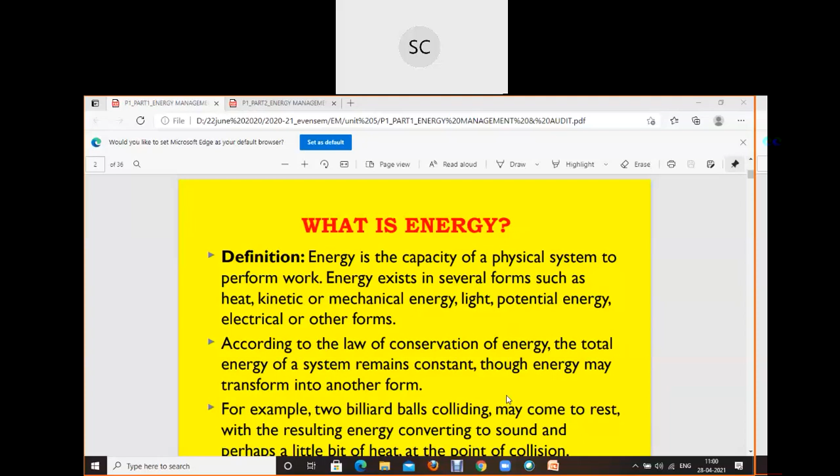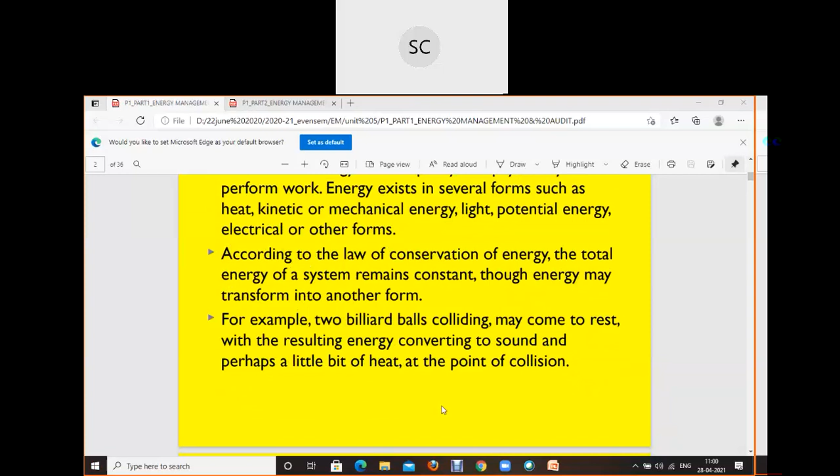Now, energy is the capacity of a physical system to perform work. Energy exists in several forms like heat, kinetic, mechanical, electrical, potential, and other forms. According to the law of conservation of energy, the total energy of a system remains constant throughout; it can only transform from one form to another. This I told you during energy conservation too. Energy can neither be destroyed nor created; we can only transform energy from one form to another, like two billiard balls colliding may come to rest with the resulting energy converting to sound and perhaps a little bit of heat at the point of collision.

Okay, let's talk about types. What does mechanical energy do? That is going to result from movement or the location of an object, and it is a sum of kinetic and potential energy.

Another form of energy, I just recommend you note down the types. Mechanical energy, and what about thermal? Heat energy reflects the temperature difference between two systems. Nuclear is the energy resulting from changes in the atomic nuclei or from the nucleus. Chemical energy results from chemical reactions between atoms or molecules. There are different types of chemical energy like electrochemical energy and so on.

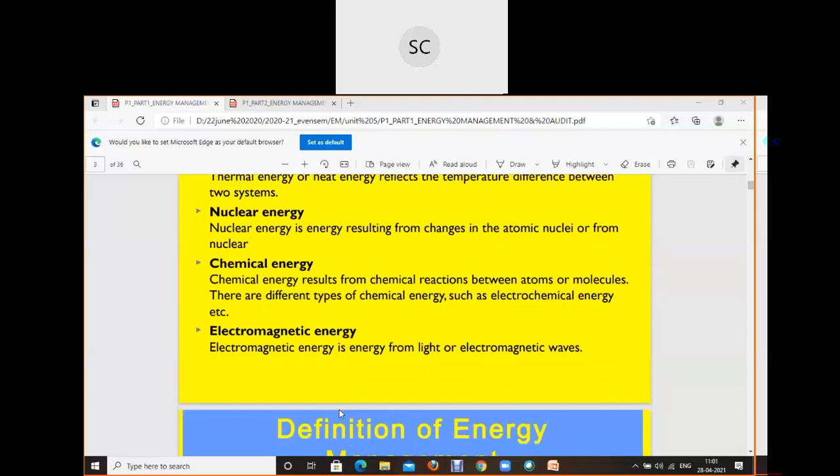All this energy, what they are doing is converting their state from one stage to another.

Energy management finally is what? A strategy, I told you this yesterday too, the strategy of adjusting and optimizing energy using the system and the procedure so as to reduce the energy requirements per unit of output, while holding constant or reducing the total cost of producing the output from these systems.

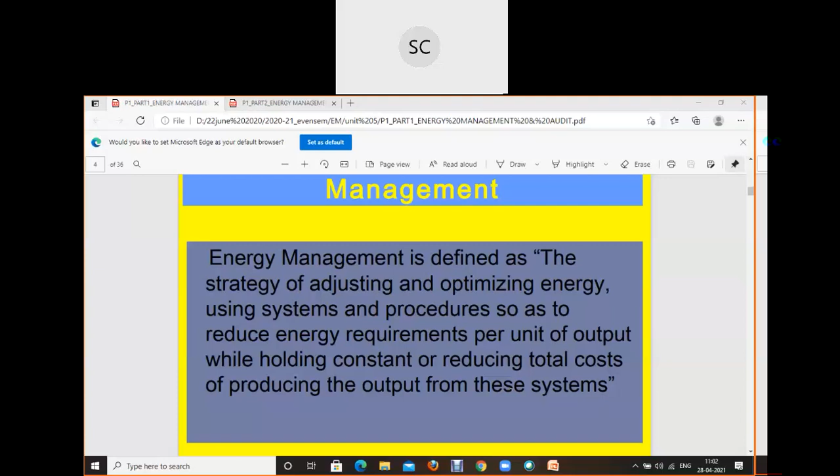This is the energy management system. How is it used to act? Energy management, for energy, acts as: plan, then do, then check. That means first, whatever management we are supposed to implement, we act upon that, then plan it, then do it, then recheck. At the managerial part, what we need to plan is policy, goals, targets, resources. What you need to do is training, communication, control equipment, systems, and processes. You need to check the correctiveness, preventive action, internal audits, etc.

Technically, what you need to do is plan: energy data management, assessments, energy purchasing, design, projects, verification. You need to check the monitoring, measurements. You need to act on the system performance.

Take a screenshot, no need to write it down. That is not very important. But yes, whatever plan we are doing, we need to act according to that: follow it, do it, recheck. That is the thing: plan, do, check, act. Meaning, after implementing the plan into action, whatever preventive or correctiveness is there, you need to check, and then act accordingly.

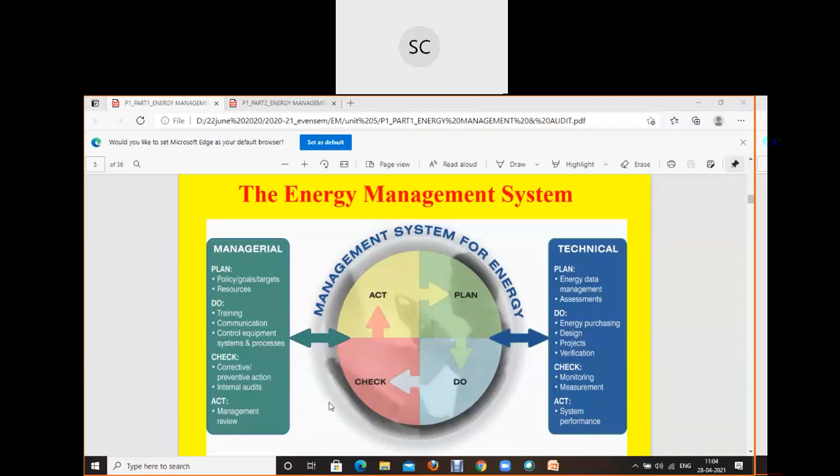Now comes the objective of energy management. This I will definitely suggest you write down, and I will give you sufficient time also. What is the objective of energy management, because energy audit is nothing but a kind of energy management, energy saving, energy conservation. So please write it down.

To achieve and maintain optimum energy procurement and utilization throughout the organization. Second, minimize the energy cost and waste without affecting production and quality. Third, minimize the environmental effect. Okay, write it quickly.

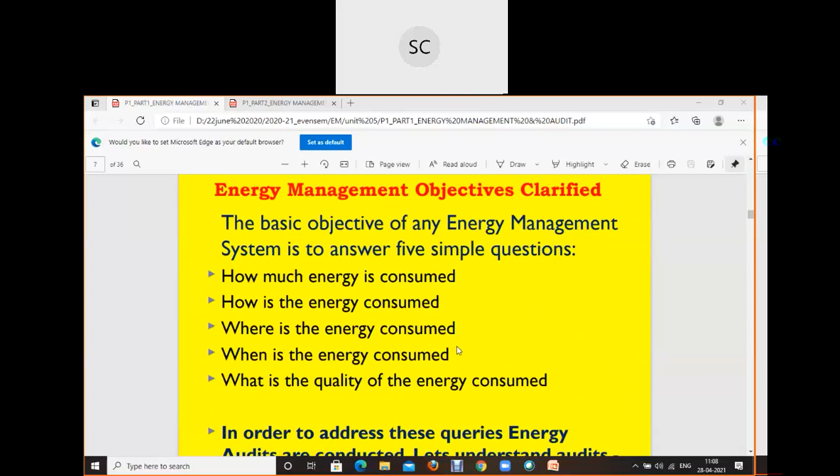I think sufficient time I have given you. Then the thing I explained yesterday, what are the objectives of energy management, which clarified what, how much energy is consumed, how is energy consumed, where is energy consumed, when is energy consumed, and what is the quality of energy consumed.

In order to manage this, audit is necessary to conduct. Finally comes the definition of energy audit. As per the Energy Conservation Act 2001, energy audit is defined as verification, monitoring, analysis of the use of energy, including submission of a technical report containing the recommendation for improving energy efficiency with the cost benefit analysis and an action plan to reduce the energy consumption.

This I wrote down for you yesterday also and told you too. So basically what is audit? According to the Energy Conservation 2001 Act, whatever monitoring, verification, analysis we are doing for saving energy, for that whatever technique we are using for cost benefit analysis and an action plan that is going to reduce the energy consumption. Okay, why is there a need for energy audit?

This also I explained yesterday, that the top 3 operating expenses that remain are energy, labor and material. So energy would emerge as top ranker for the cost reduction. The primary objective of energy audit is to determine ways to reduce energy consumption per unit of product output or to lower operating cost.

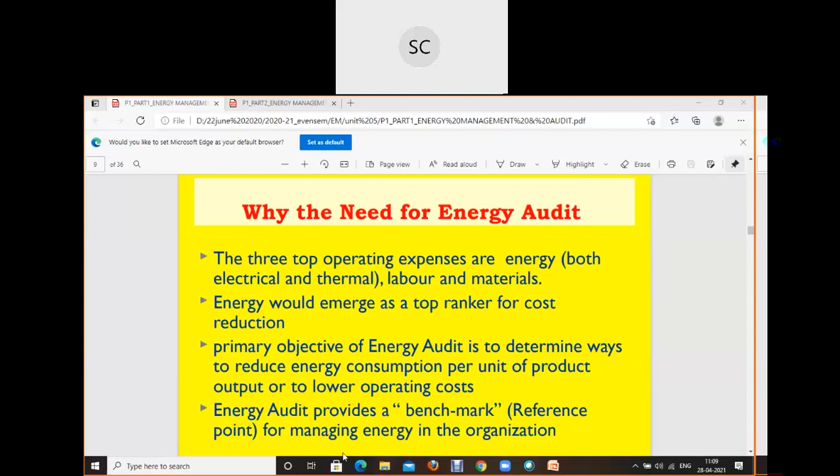So the main point of energy audit is that it provides a benchmark for managing the energy in the organization. Meaning we decide certain benchmarks, some reference points. This is a limit, beyond that energy should not get consumed. If it gets consumed, a certain fine is going to be there. So that is the benchmark or referencing point with reference to that.

Now comes the real part. These are the types of energy audit: preliminary, targeted, and detailed. These three names I had written down for you yesterday. Now we are starting with preliminary energy audit. I told you we'll explain this in detail.

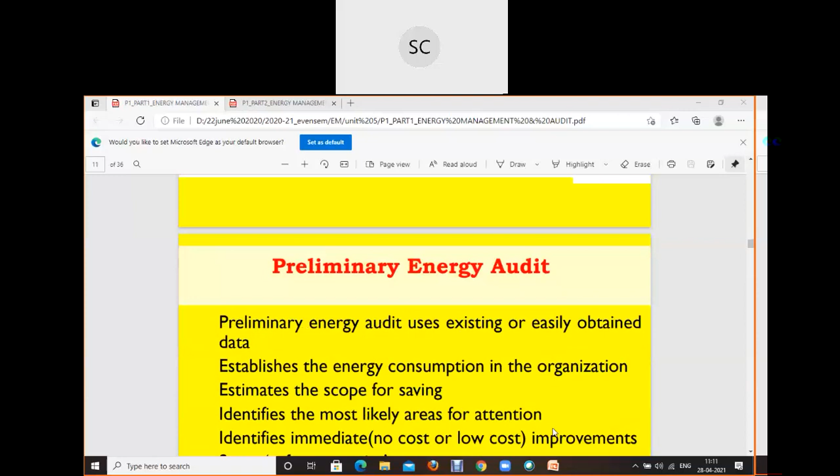I just suggest you, sometime this difference between the three used to be asked. So write this down, some things don't match. So what will PEA, your preliminary energy audit, do?

Preliminary energy audit uses existing or easily obtained data. It establishes the energy consumption in the organization. It estimates the scope for saving. It identifies the most likely area for attention. It identifies the immediate improvements. It sets certain reference points which identify the area for more detailed study.

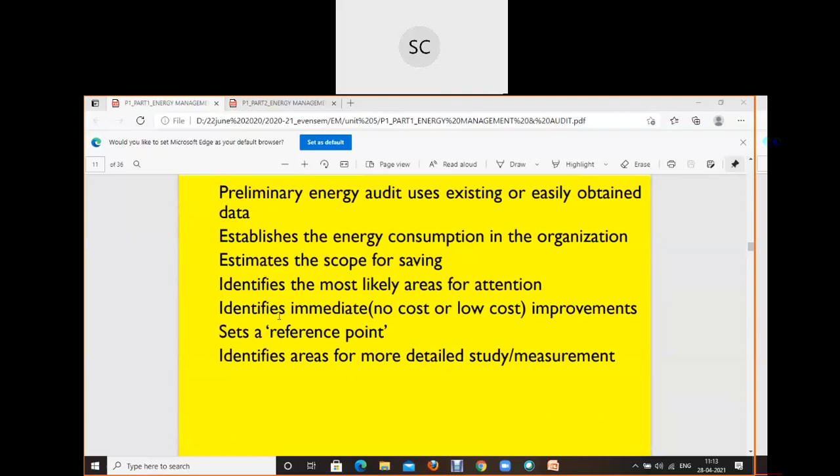That is why I told you to write down whatever is the result of preliminary energy audit, it works on those results. So write down this first point: this is mostly based upon the outcome of the PEA results.

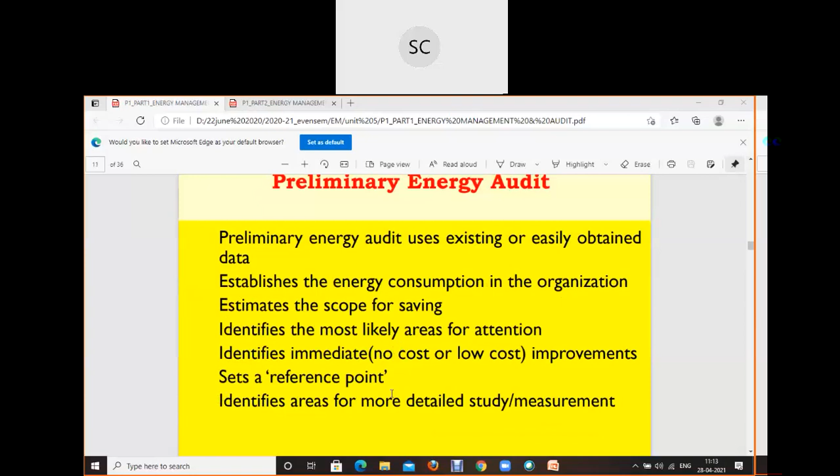They provide data and detailed analysis on a specific target project. What used to be there? Preliminary energy audit, whatever reference point it sets, whether the energy conservation or saving is following that or not, depending on that result, they set their target. That is why it is called targeted energy audit.

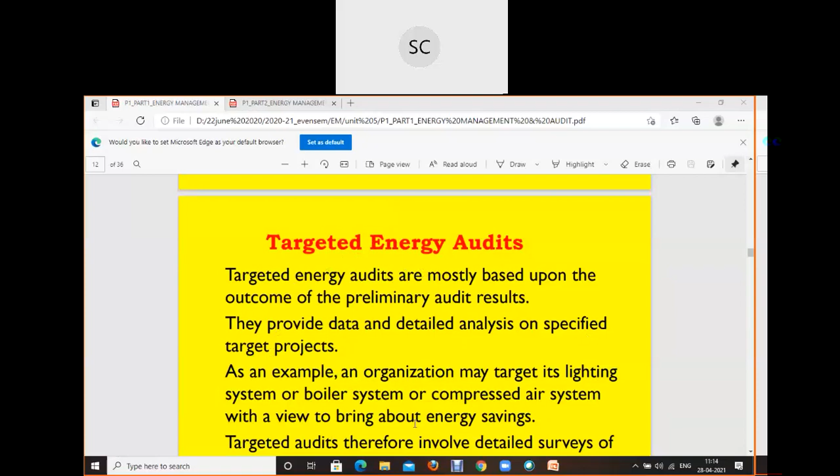They provide data and detailed analysis on the specific target project. For example, organization may target its lighting system, boiler system, compressed air systems, like that. Targeted audit therefore involves detailed survey of the target subject areas with analysis of the energy flow.

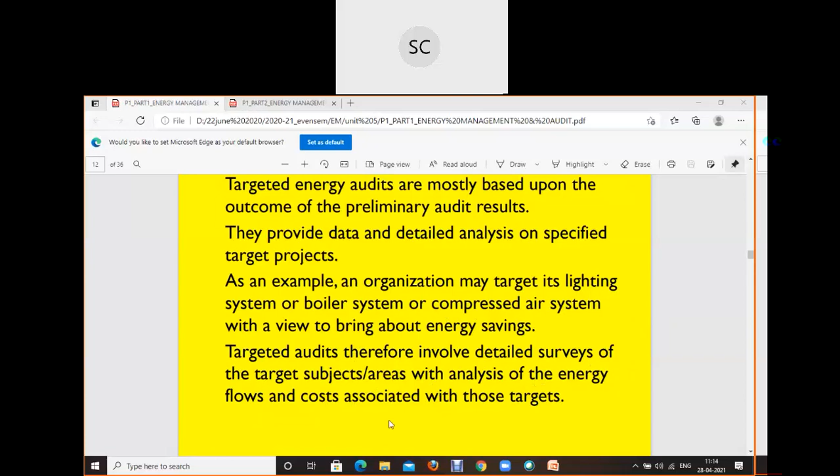Okay? That is going to be there. I just want you to write down the first line and the last line, that is going to be important, that the result of primary based, on that, the target works. And the second point is also important: they provide the data and detail analysis on specified target projects. Okay? And targeted audit therefore involves detailed survey of the target subjects.

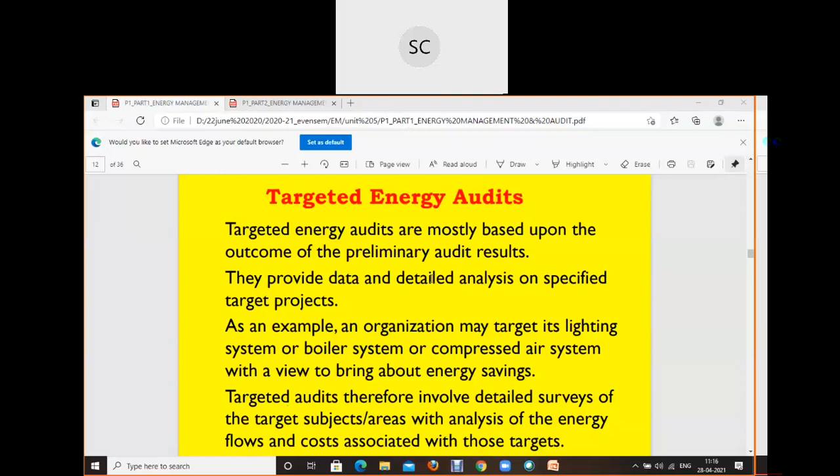Now third is a detailed energy audit. It evaluates all systems and equipment which consume energy, and the audit comprises a detailed study on the energy saving cost. Detailed energy audit तीन phases में काम करती है.

Means after the preliminary and targeted energy audit. Targeted energy audit क्या कर रही है? After getting the data from primary, it is setting certain targets, detail analysis for the specified targets. उसके बाद डिटेल एनर्जी ऑडिट क्या करेगा?

प्री ऑडिट फेज एंड पोस्ट ऑडिट फेज, ये 3 फेजेस में जितने भी सिस्टम्स हैं उनको evaluate करता है - an equipment that is going to consume the energy. An audit comprises a detailed study on energy saving and cost. लिख लो ये तीनों नाम.

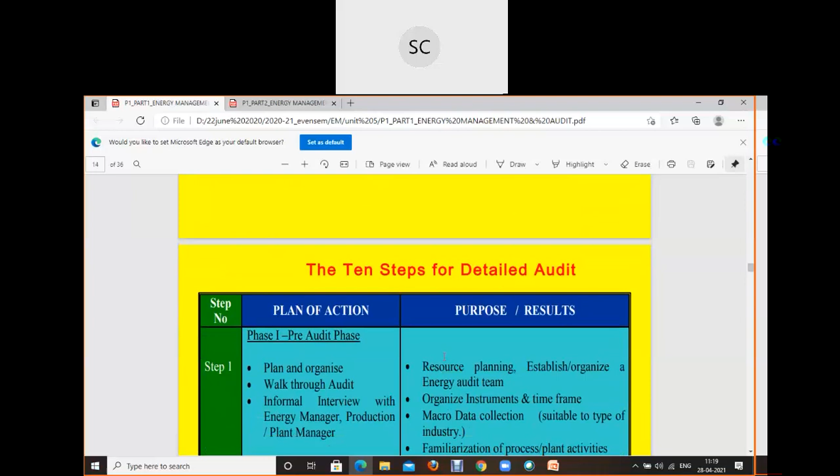जैसे हम कह रहे हैं प्री ऑडिट होती है, फिर ऑडिट होती है, फिर पोस्ट ऑडिट। प्री ऑडिट मीन्स प्रिपरेशन फॉर द ऑडिट, फिर जो फाइनल ऑडिट फेज रहता है वो ऑडिट होने के बाद जो कंक्लूजन हम निकालते हैं दैट इज अ पोस्ट ऑडिट। Now 10 steps plan of action रहता है डिटेल ऑडिट का।

इसमें plan of action है, phase 1 से लेके तीनों फेजेस हैं इसमें। ये तुम अभी लिख नहीं पाओगे, I just suggest you to take the screenshot। Step 1, phase 1 की हम बात करते हैं।

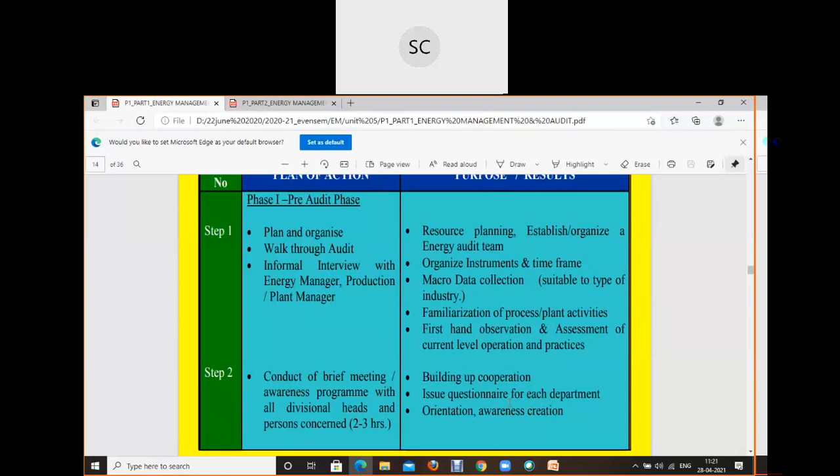टेक द स्क्रीनशॉट। ठीक है।

Plan of action जो है उसकी 2 ही step है pre audit में, 1 and 2। Second phase जो audit phase का है उसमें primarily जो data gathering है, process flow diagram है, energy utility diagram है, that is going to be there, and conduct the survey and monitor.

So what is the data gathering process, data flow? इसमें historic data analysis, baseline data collection is going to be there. Prepare the process flow charts, all service utilization system diagram, like single line power distribution, design and operating data schedule of the operation, annual energy bill, that is going to be there in your primary data gathering.

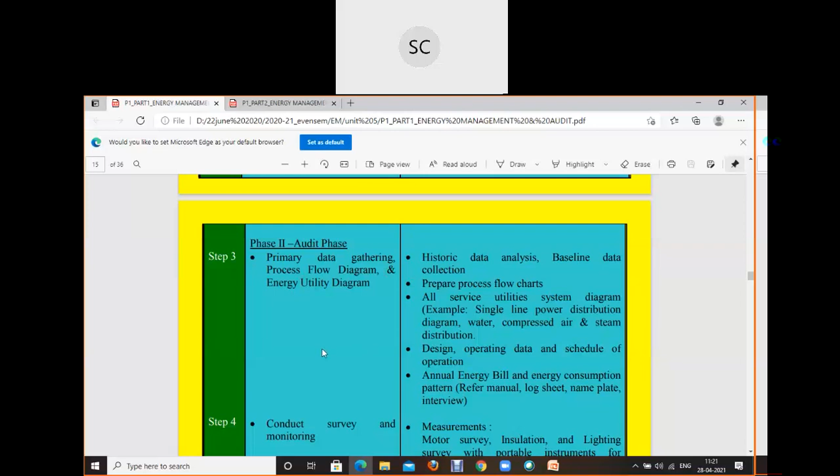Process flow diagram, energy utility diagrams, और फिर हम conduct करते हैं survey and monitor। ये हमारे audit phase में रहता है। सर्वे और मॉनिटरिंग से क्या होता है? It is a kind of measurements of what?

Motor survey, insulation, lighting survey with portable instruments for collection of more and accurate data. It confirms and compares the operating data with the design data. ठीक है।

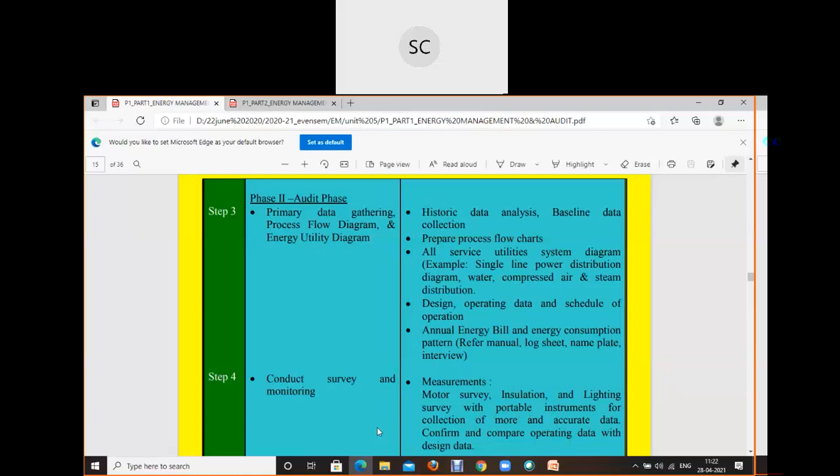Is it clear? So this is step 3 and 4 involved in audit phase.

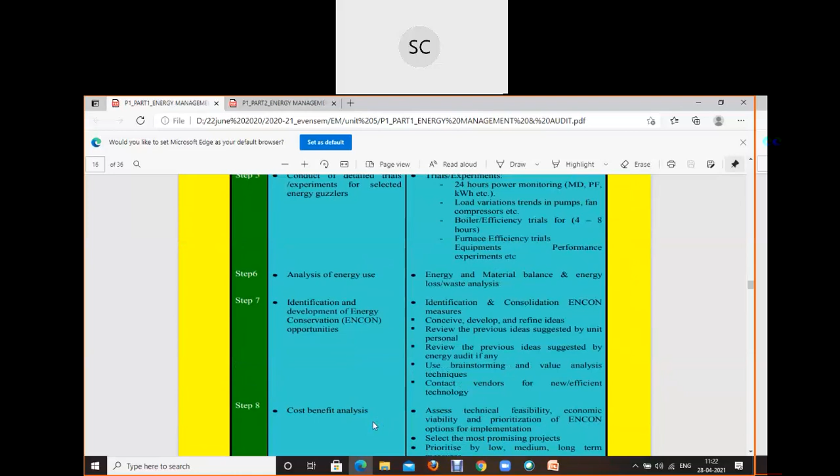Then step 5 is conduct the detailed trials, experiment selected energy guzzlers, analysis of energy use, identification and development of energy conservation opportunities, ENCON - identification and development का energy conservation opportunities का। अब इसमें trial और experiment 24 hours होते हैं for power monitoring like MD, PF, power factors। ठीक है।

इस तरह का energy audit जो है, ये जैसे RSWM है, तुम्हारा संगम है, डेनिम प्लांट्स है, इनमें 24 hours ये monitoring होती है कि power factor vary तो नहीं हो रहा है, से कितना रहना चाहिए, कि watt power कितनी vary हो रही है। All the shift engineers and junior engineers used to monitor that and to maintain that. And with reference to the supply given boilers, जैसे कहते हैं what is the need of mechanical engineer in the textile industry?

Whatever boiler condition is there, a mechanical engineer can better understand than other engineers. The furnace efficiency trial, equipment's performance, energy and material balance.

Identification and consolidation of ENCON measures, conceive, develop and refine ideas, review the previous ideas suggested by the energy audit, use brainstorming and value analysis, contact the vendor for new efficient technology, cost benefit analysis.

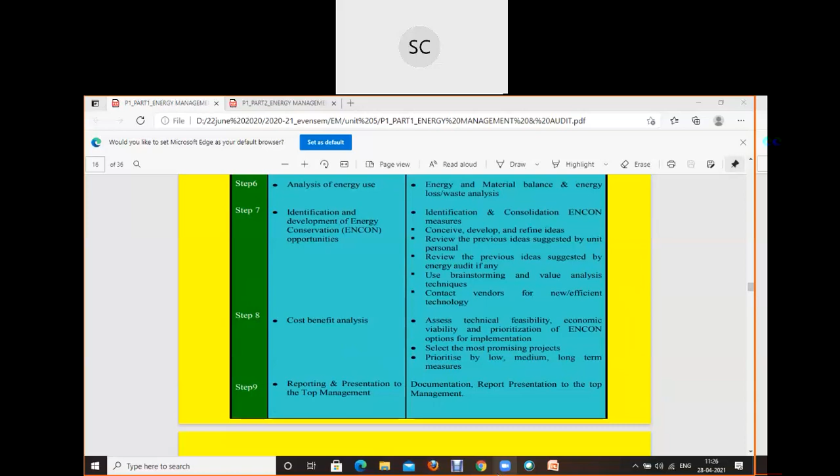Phase 3 is implementation and follow-up, that is the post-audit phase, which is the 10th step. Assist and implementation of ENCON recommendation measures and monitor the performance. Action plan, schedule for implementation, follow-up and periodic review, that is going to be there.

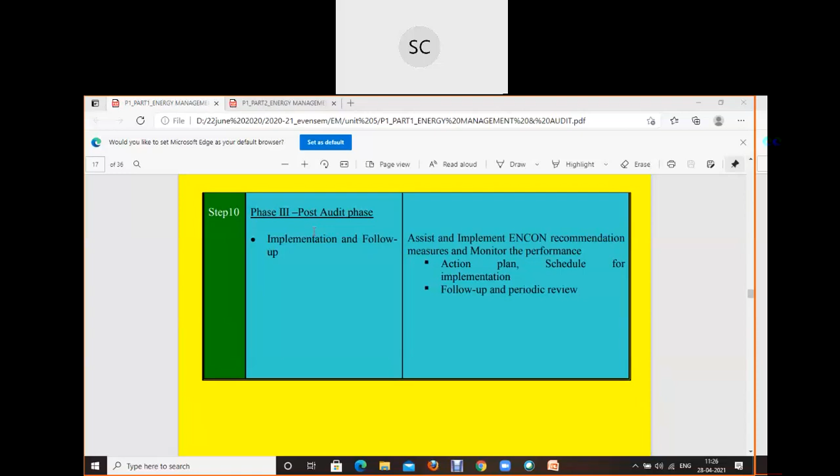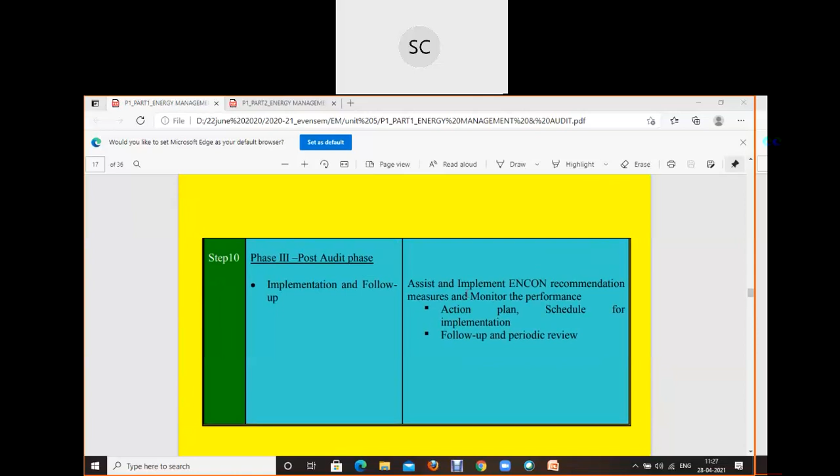Till now in energy audit we covered why energy audit is important, what are the three types - preliminary, targeted and detailed audit, right? Then the 10 steps to follow for the pre, post and audit phase, that we completed.

Now the questions which an energy auditor should ask whenever they come for energy audit, from RSCB or wherever - what function does the system serve, how does the system serve its function, what is the energy consumption, what is the identification that the system is working properly, is the system not working, how can it be restored to good working condition.

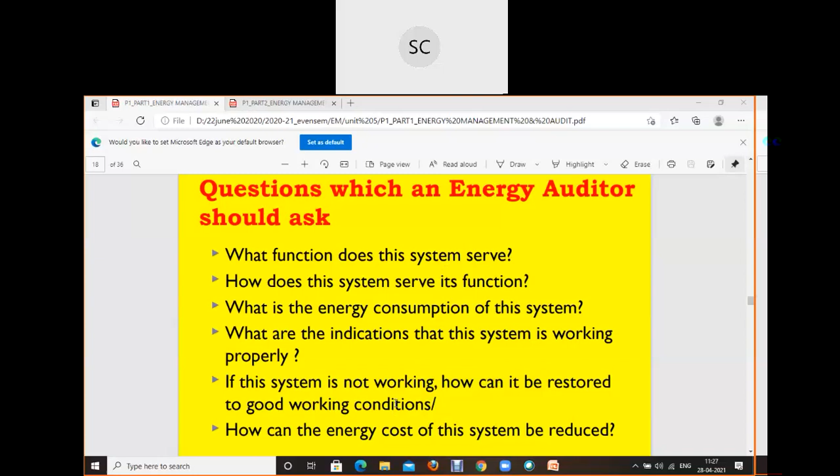No need to write, just understand. This question could be asked by an auditor: how can the energy cost of this system be reduced?

Detailed energy audit for a typical industrial format is like this: the energy audit team, the person's names which used to follow, then scope and purpose, then recommendation and option, like introduction about the plant, general plant details, component of production cost, major energy usage, production process description.

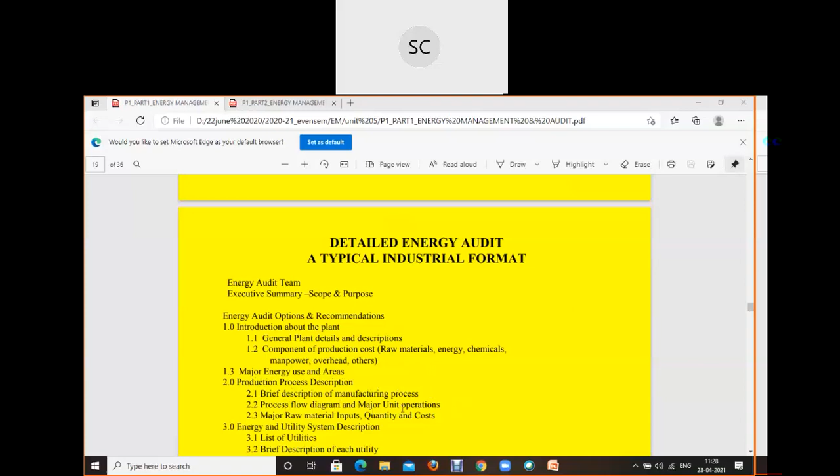Then energy and utility system description, like brief description of each utility like electricity, steam, water, compressed air, chilled water, cooling water - this kind of detailed purpose.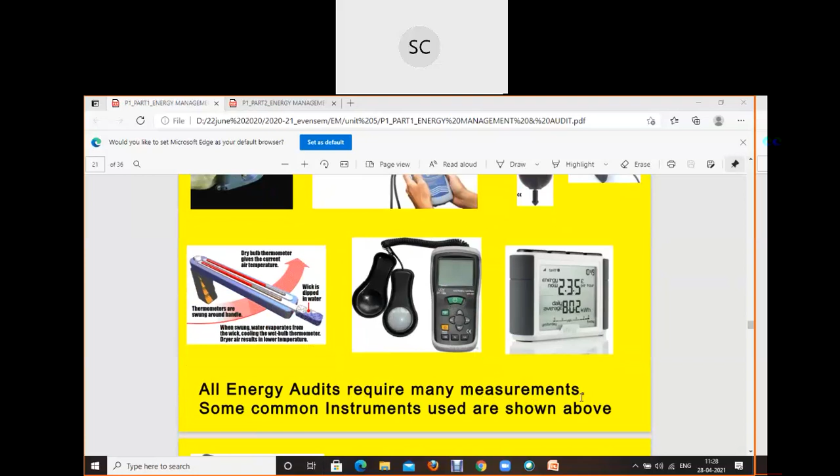All energy audits require many measurements. Some common instruments are used there. Actually these are the instruments which they use to take the value and readings, how much it is coming or not.

These kinds of instruments are there, some like this. Just for your awareness, I am showing some more energy audit instruments.

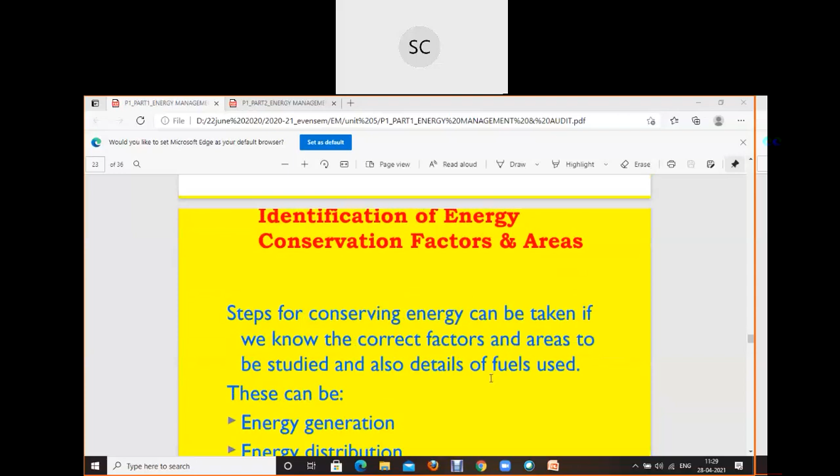Identification of energy conservation factors and areas. Steps for conserving energy can be taken if we know the correct factors and areas to be studied, like energy generation, energy distribution, energy usage by process, fuel substitution.

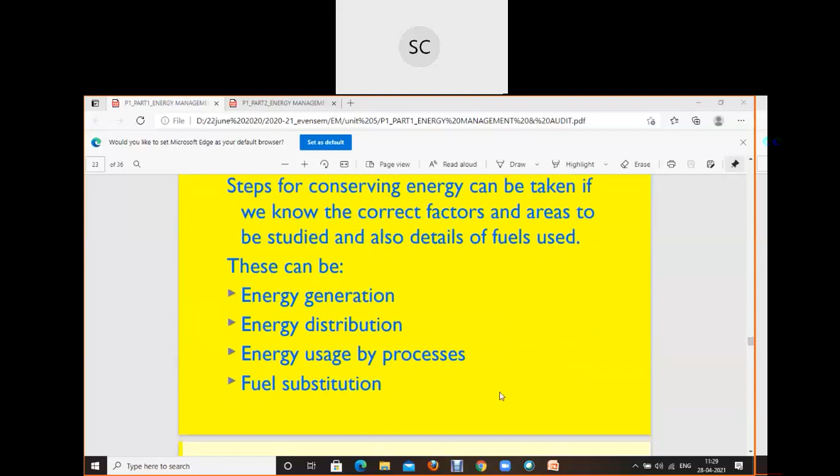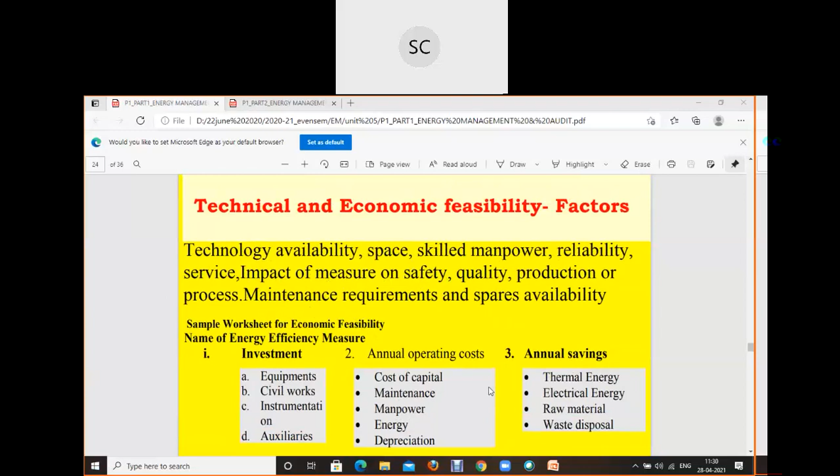Okay, this is a common one.

What is benchmarking? Benchmarking is another important point. This is the last topic which we are discussing, then we'll end. Okay.